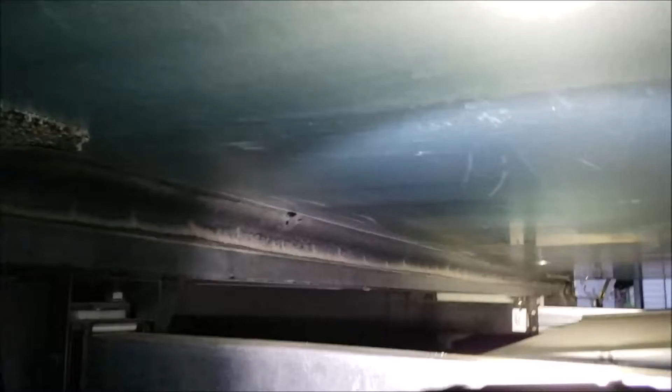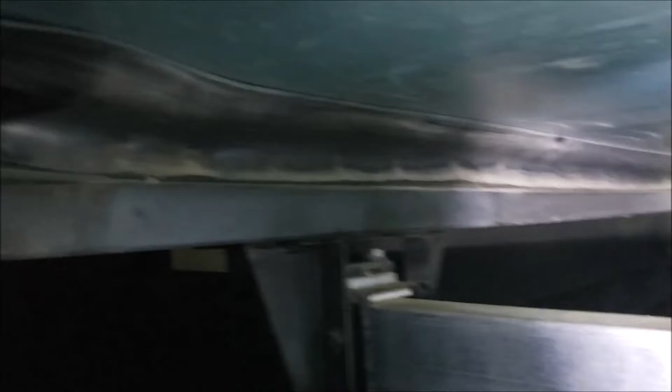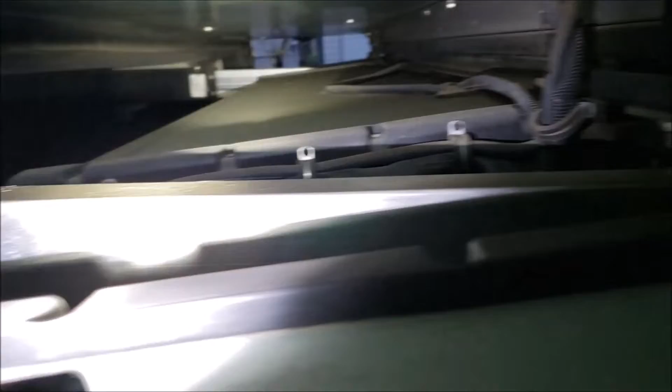So that plan ain't working so good at the moment. But what's happening is all the weight of this room. See how big this slide is, goes all the way up here. It extends out about a good 2 feet. Well, it's supported by this ram. See this big ram arm that goes all the way back into the frame.

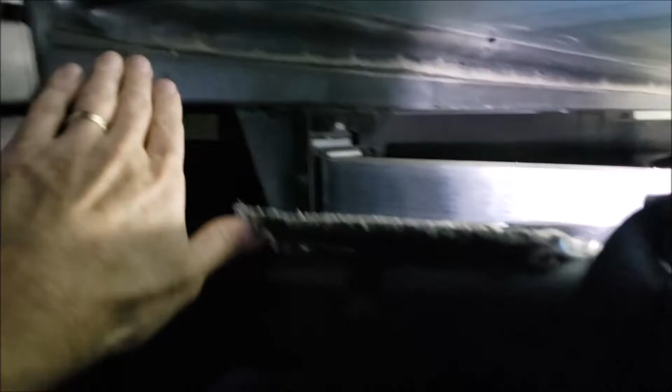The only support it has is right here at the very end. So at the very end of this, it's supporting the weight of this room. But back here, the weight is all transferred onto the floor. There's no bars or anything going from the ram to the room to support that weight. All that tremendous weight is back on the floor.

And so that's what gives us so much grief when we go from carpet to a hard floor. There's so much weight on there, and trying to get in here, you really ain't got access to that glide shoe without taking the dang room out. Unless we can try to get some carpet wedged under there, stuck under there where it's permanent. That might be ideal.

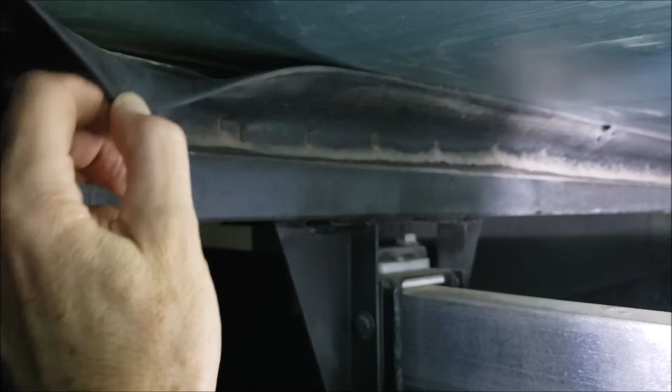I just thought of something else. All right, let me try that. Okay, going test, going out, going out. Oh, nice and quiet. All right, let's bring it back in one more time. Okay, he's filming.

All right, now take it out. I tell you what, I'm gonna go outside. Let me film it as it comes out the other side. Come on, yeah, bring it on out. See what it looks like from this end.

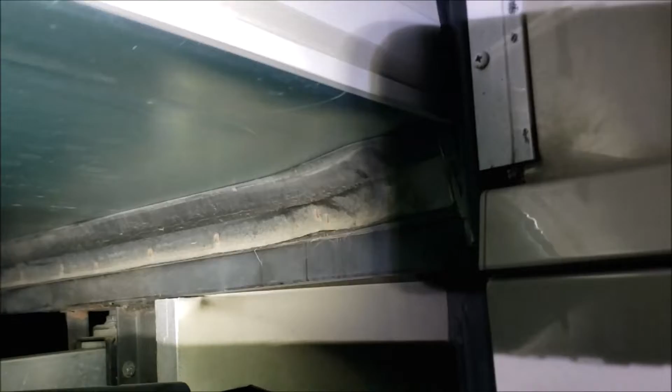Here comes the carpet. Woo! And nice and quiet, no more tearing up the floor. All right, it's not a permanent fix, but it's a temporary fix.

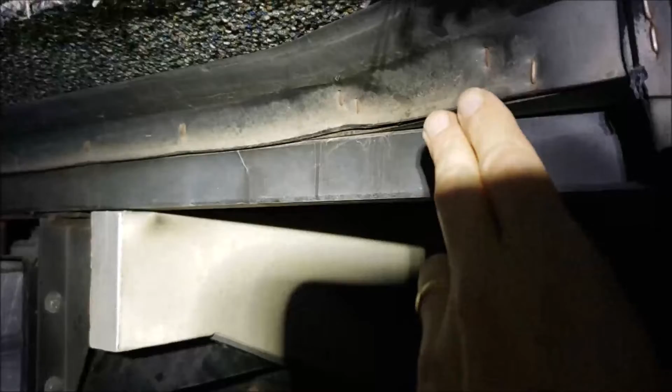The more permanent fix would be to take this rubber off, get down below that wood, staple new carpet to it, run that carpet in on the floor all the way across the whole thing, I don't know how long this is, 10, 12 feet long, all the way to the end where the slide shoe would stop, or glide shoe, I think it's called, glide shoe, slide shoe.

That would be a more permanent solution. Let's go inside and talk about that. Okay, so you can see what we did. That's not real pretty, but the person could make it prettier, get a better matching carpet.

And that would keep this from happening for a while. But a more permanent solution, I thought, would be to staple carpet around that corner outside and bring the carpet all the way in to where it stops. I can't remember if it stops about here or maybe here.

So take up all the wood from this line back, get back down to the original flooring, put down carpet and staple the heck out of it so it doesn't get loose, because you got to think about that carpet being pushed and pulled. The weight on this floor is putting a tremendous amount of pressure on this carpet, trying to shove it this way and that way.

So it's got to be fastened extremely well on both ends, because I shot a bunch of drywall screws on this one. So if you come in here with carpet, you got to staple the heck out of it to make sure it doesn't get pulled loose. And same way, when you roll around that edge to the outside, you got to staple it really well.

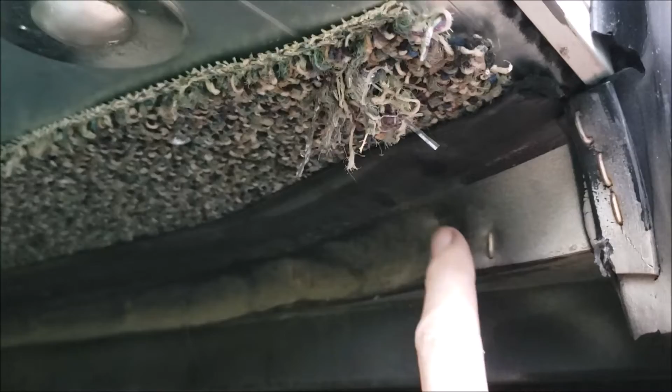And then I'll take you outside and show you exactly how the carpet has to be attached. Okay, so here we are. So what you'd have to do, now every RV is a little bit different, but you'd have to take this rubber off and attach your carpet behind this rubber, because you have to roll it around. It's starting to get dark out here.

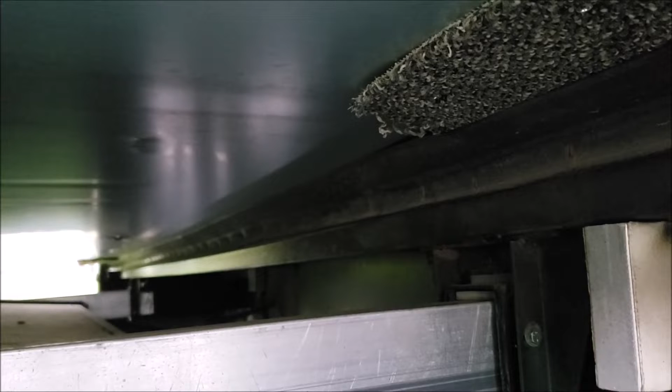Kind of hard to see, but that's what you have to do, and that's what they did from the factory. They had the carpet, and in fact sometimes you can see remnants of the carpet underneath this piece. It's got to have a really good fasten point to keep that thing from pulling loose. Different RVs do it differently. On my 38J, which is a 2002 Venture, the carpet comes all the way down to the bottom, and there's a metal strip that goes all the way across, screwed up into it, pinching the carpet and keeping it in place. That gives you a couple different ways to approach this and get it fixed without tearing up your pretty new floor.

Well, it's been over a week now since I worked on that floor. I think it was a 2002 Winnebago, trying to remember which one it was - wasn't a Voyage, but I know it was a 2002. We got his slide working pretty good. It's somewhat humbling to me that he drove from Washington State to Kentucky for me to look at that and get him fixed. He also had some other issues - his generator wasn't running, I got that going too, and that'll be in another video soon. But he's on his way, probably back to Washington State by now.

But I got to thinking about how these rooms are different, because he has HWH on a Winnebago, and his room slide went straight out. Now a lot of us, like with the 38J, have a little bit different HWH design with the Store More slide-out system, where the rooms go out but then drop down level. His didn't do that. These are a little more complicated, a little trickier to adjust, but they still have the same issues - if you try to change carpet and put in flooring, you're going to have a lot of issues with it.

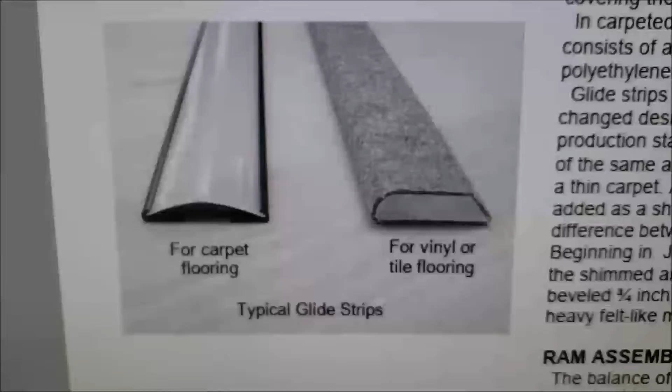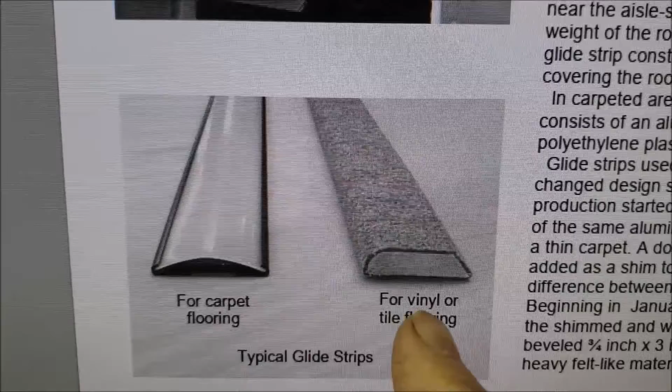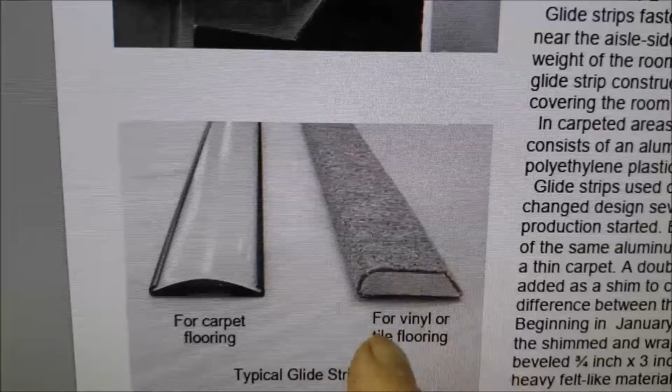So I found this PDF I have on file. Let me scroll down to where I was talking about the glide strips. You see this one here, this is for carpet - it's got that hard plastic, and that's what scratches your floor all up. Now they do make a glide strip for vinyl flooring, but that could still give you troubles, because you've got to imagine the total weight of that floor sliding across there. If any speck - a small pebble, a rock, a staple - gets hung up between that and your pretty new floor, it's just going to gouge it right up.

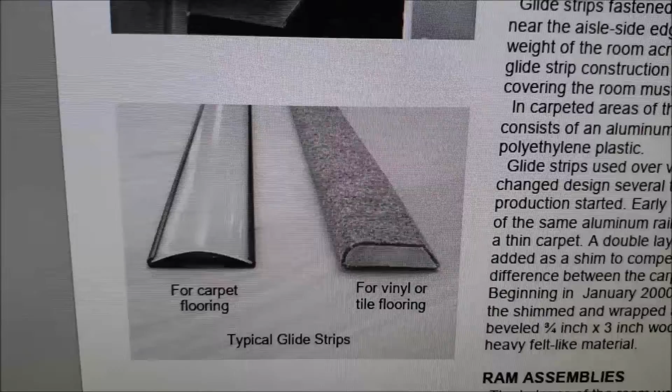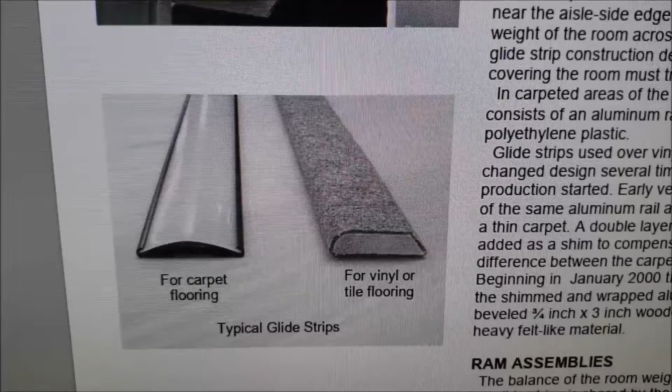So I'd highly suggest trying to go back with carpet if you could. Our carpet's starting to get to that point, and I've got to make a decision whether to replace it. I've even considered - I've seen some videos where people actually make a carpet stain. So if you've got carpet that's looking bad, you could actually stain it another color, and that might be a possibility.

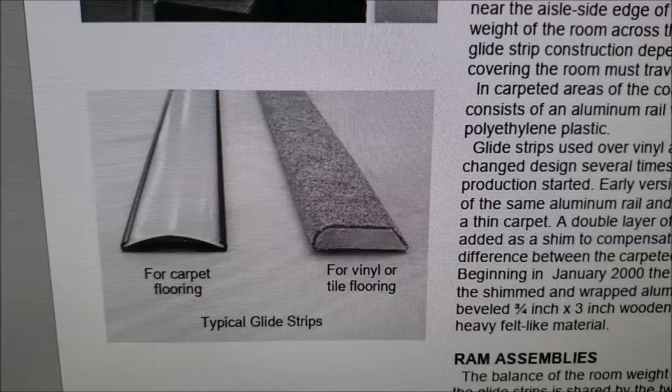So I'm going to take you out now to our RV and show you how it's designed, how its glide shoe works.

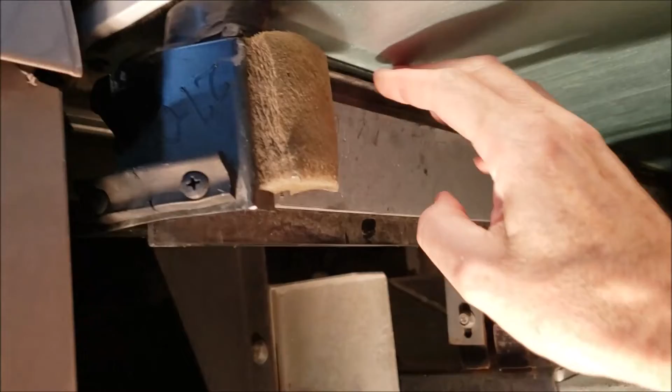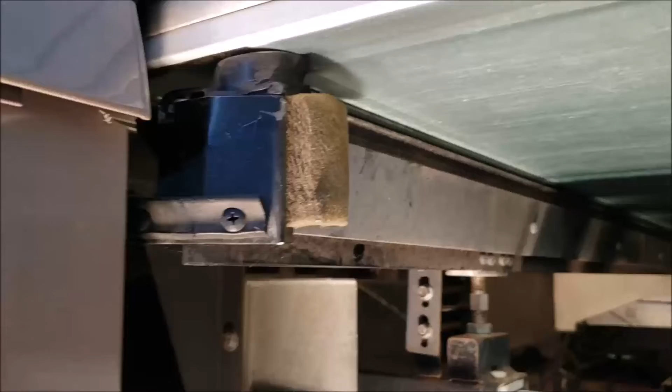All right, so now we're out here at my 38J, and you can see how the room comes out and drops down level. It's a little bit different design, but underneath this flap you can just see that white plastic that I just showed you in that PDF file. So that's our glide shoe, or glide strip as they call it. As it comes down, it rests right on this. You can see that would be a pretty good job to replace - well, maybe not too bad. You have to take all this loose in order to change it, but still, don't know if it'd be worth the trouble or not.

Now, I was noticing, trying to think about in the future if I want to change carpet on ours. Let me crawl under the RV and see if I can see that.

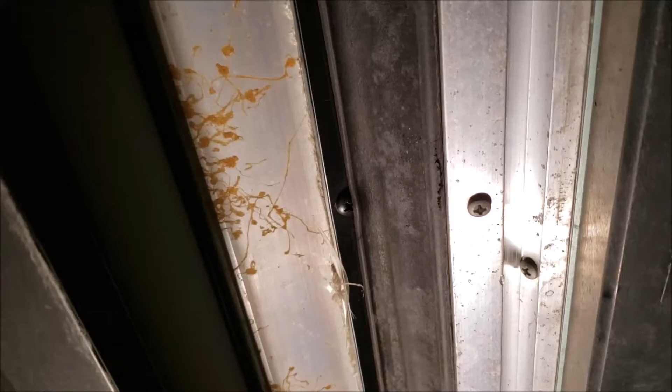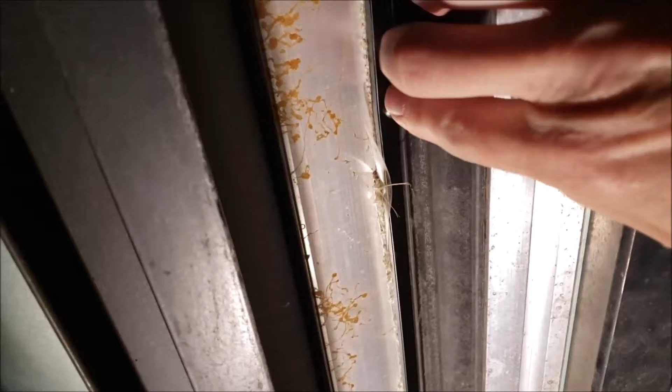Okay, so under the RV we are on the driver's side, and you can see a little bit of the carpet here. If I pull back this flap, you can see the carpet. They've got that attached with this metal bar and screws that run 10 or 12 feet, however long the slide is. So the carpet has to have a really good attachment point because of the stress it's putting on it as those heavy rooms slide across them. And of course they stretch the carpet all the way over to the other side of the room and staple the heck out of it - 4,000 staples from what I've seen. All right, so let's go inside the RV.

So you can see our carpet, this is a 2005 model, is showing its age. Now what we do, we have this piece of carpet here that we fold out once we get to our destination that helps kind of hide it. So I am going to try to maybe shampoo it one more time, use some really good cleaner, maybe I can bring it back. Or remember I talked about the possibility of just staining it. I've watched videos where people take a carpet stain, put it in a pump up sprayer, and just spray your carpet a different color. So that might be an option to avoid a whole lot of extra work.

That might be the first option. Try the stain. If that don't work, then think of something else.

But like I talked about, if I was going to change this carpet, like I showed you when I was underneath the RV, you'd attach it first underneath there on that metal strip, and then come over here and stretch it across. Probably have a stretcher, and you got to do the same thing on the other side because it's also got a metal bar that it attaches with. That's right, I was talking about staples. So the staples, that comes up here. I've seen them along the edges. They really put a whole lot of staples around those things, where I've seen people pull carpet up before.